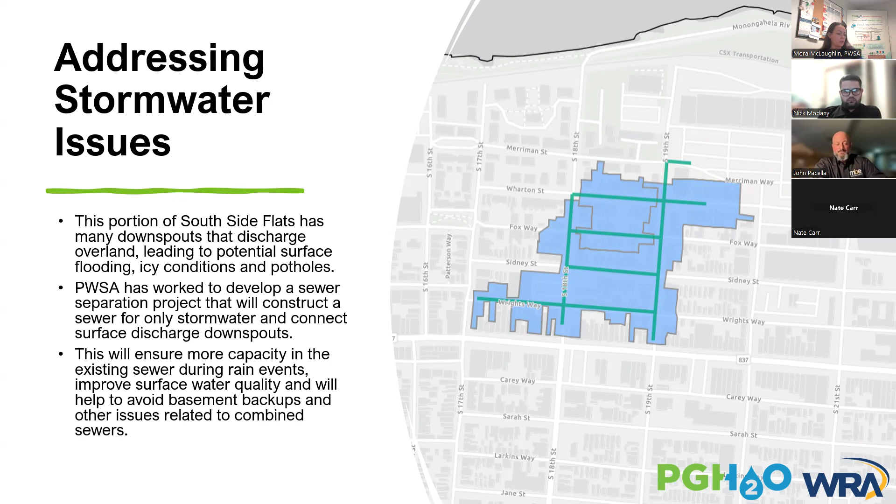So this is a map of the project area. It's laid out, color-coded here. You can see the pink is sewer pipes. There's a couple areas where there's blue pipe, that is the water main. We're going to construct new separate storm sewer pipes, as well as the manholes and the catch inlets associated with those pipes. We're going to connect properties where we can with downspouts to the new storm sewer, plumb them into the sewer. And we're going to replace some water mains on Wharton Street and Fox Way. When we were designing the project, we determined that since we were going to be exposing the roadway and paving after the fact, we want to make sure that as much infrastructure that needs upgraded is upgraded during this project.

So we're going to address those sections of water main on Wharton and Fox Way. As part of any water main replacement project that we do anywhere around the city, we are always looking for lead service lines attached to those pipes. So as part of that work, we're going to identify and replace any lead we find at no cost.

So for anybody that lives on Wharton and Fox, you should have received some lead service line agreement packets in the mail. I think we have almost all of those returned with the exception of a couple. And we're also going to repave and restore sidewalks.

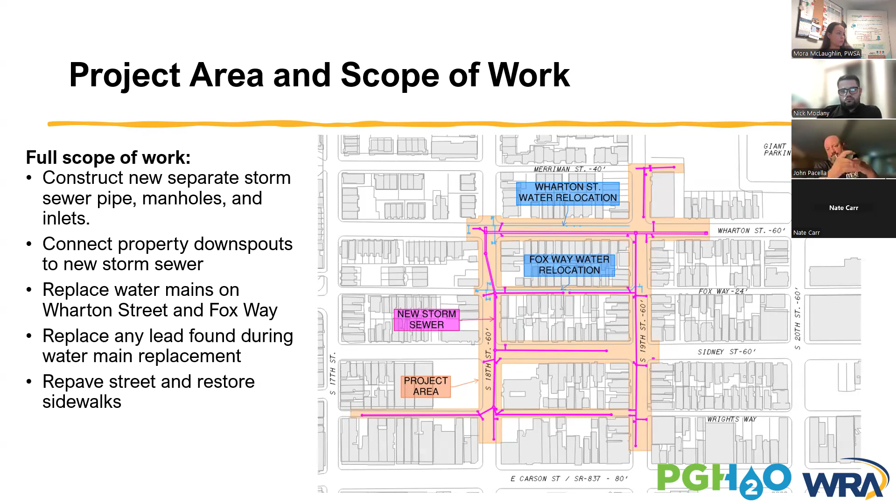So we want to talk a little bit about a touch point that we have with the customers in this project area where we do need something back from the customers to proceed with work. We're calling this the authorization for sewer lateral connection. For the full storm sewer lateral, those who sign the agreement are people that have a downspout at the building face. Repair and maintenance is the property owner's responsibility.

The PWSA owns and maintains the storm sewer and the point where the private sewer lateral, which takes sewage flows away from the home, and the public main connects. Now, a partial storm sewer lateral, this is for people who do not sign the agreement or do not have one of those downspouts that just discharges on the surface. That's from the PWSA storm sewer to the sidewalk.

They're going to repair and maintain the future connection, but that's the property owner's responsibility. And we are going to own and maintain the storm sewer and the point where the lateral and the main connect. So you can see a graphic there of what a sewer lateral is and what a PWSA owned public sewer looks like generally under the street.

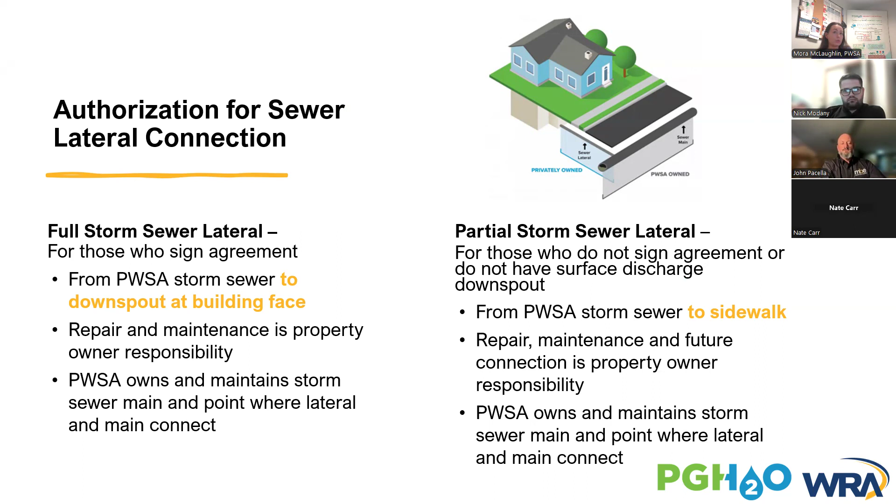Obviously, this layout is a little bit different than South Side Flats. Oftentimes, the properties in this neighborhood are very close to the street and sidewalk. But this is a typical graphic. So in order to do this work, because we are slightly going onto private property, we did send people who are eligible an agreement. It's pretty straightforward. We just need basic property information and a signature of the homeowner.

And like we said, if you decline this work, you choose not to do it, we will not provide that additional service to you. But at this point, I want to see if there's any additional information that our project team wants to share about these agreements, how we can collect them and get them back from residents. Is there anything, Marco, you would want to share quickly?

Hello, everybody. Yes, the CM team does have a list of residents that have signed agreements, as well as a list of residents that don't have signed agreements. We are going to make one effort here to blitz all of the residents at one time, just to let them know as a common courtesy, we'll be in the area. If you do have an agreement, we'll tie you in.

If we don't have an agreement, we're still going to make that phone communication and also document that communication to give one last effort for all the folks out there to at least tie in at this time. So keeping that in mind, we know from talking to Allegheny County Health Department that in the future, if you were to sell your house and there is a separate storm system, they are going to require you to tap in. So we're trying to be a good role model here and a good player to the residents in this location to get everybody to sign the agreements and also get everybody to tie into our separate storm sewer.

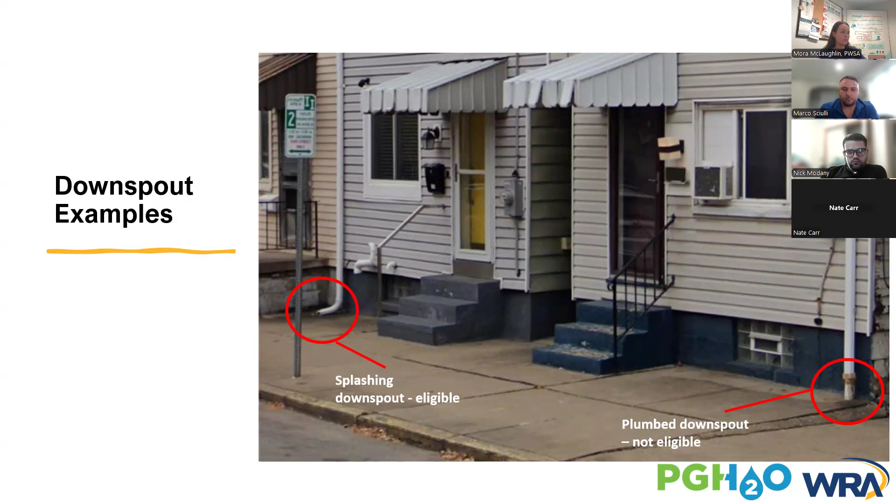All right, and this is just a little bit more information, kind of an underground graphic here. We're going to plan to install a storm sewer and storm sewer laterals from the new sewer main to the public right-of-way and connect any of those downspouts that are discharging on the street and sidewalk, which you saw on the slide before.

The top one, you're kind of looking down at the street and seeing what's underground, and the bottom image is kind of a profile of that new storm lateral coming out of a property down below the sidewalk, down into the street, and eventually connecting to that public sewer main. This is all no cost to our customers. It's part of the design of the project. So I really would encourage anybody who hasn't signed and returned that agreement who is eligible to do it. While the work is happening and the street will be open, it's the best time to do it.

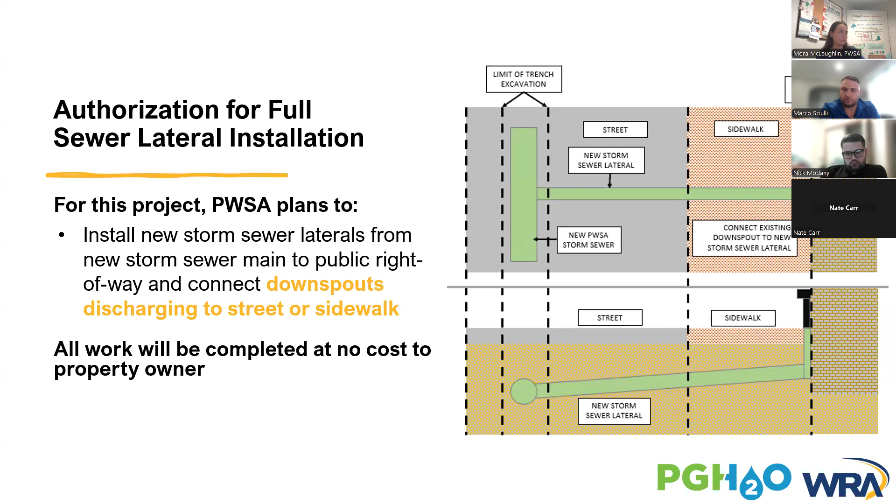And this is the partial sewer lateral installation. So you can see here, slightly different. That new storm sewer lateral is going to be built up to basically the curb line. We are not going to connect that existing downspout that's already plumbed into the combined sewer. But that new storm lateral will be built halfway to the property and will be there and available if in the future the homeowner decides to make that adjustment.

And again, this is at no cost as well. This is a little bit additional work that PWSA might not typically do. But yeah, we wanted to bring that new storm sewer lateral up to the edge of the public property and have it there as an option for the future.

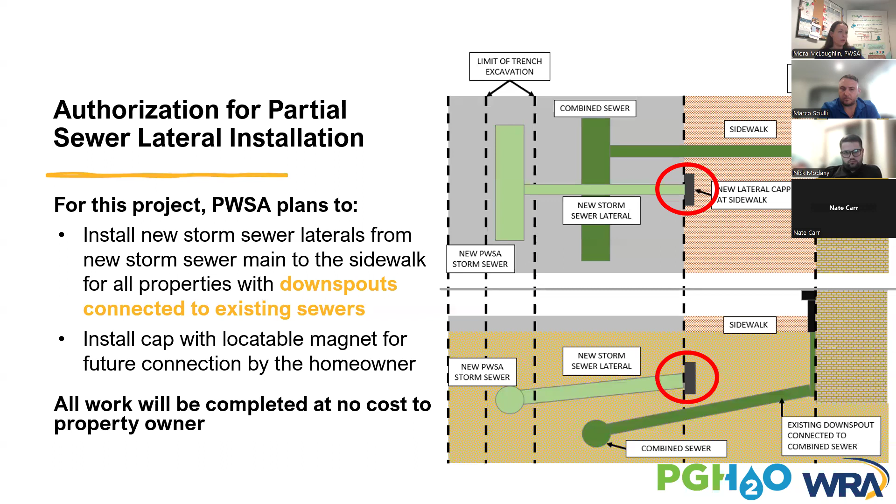Touch a little bit on lead service line replacement. It's going to be related to the water main work. This is only happening, like you saw on that project map, in only certain parts of the area where we determined the water main was due for a replacement. Some of the lead service line replacement work that happened last year was actually part of an American Rescue Plan Act funded project. So we did just get some lead service lines out of the project area, knowing that we were going to be coming through here soon. We wanted to get that work done and out of the way before the more major sewer and water main improvements happen.

But as it relates to the Wharton Street and the Fox Way work, you've been sent a lead service line agreement, which needs to be signed and returned, similar to that downspout agreement, to allow us to have access to your home to replace any lead on the private side of the service line if it is found. The first step will be to dig a small test pit and verify the material of these service lines. Non-lead service lines will remain in place, although the public side will be replaced just as part of the water main work. But if any lead is found on the private side, we then utilize that agreement. We start to work with you and replace that private side lead at no cost.

So again, this is a slightly different graphic than the one you saw a few slides ago. This is a typical water main setup. So you see the public water main running down the street. You see the service line teeing off of that water main, providing service to the home. The portion between the water main and the curb box, some people call it a shutoff valve. It's actually a little valve in the sidewalk that we can turn water on and off at a property. It's kind of the line of demarcation between public and private. And from that shutoff valve into the home is the private service line, which is typically owned and maintained by the homeowner. But as part of this work, if it's lead, we're going to replace it at no cost to you.

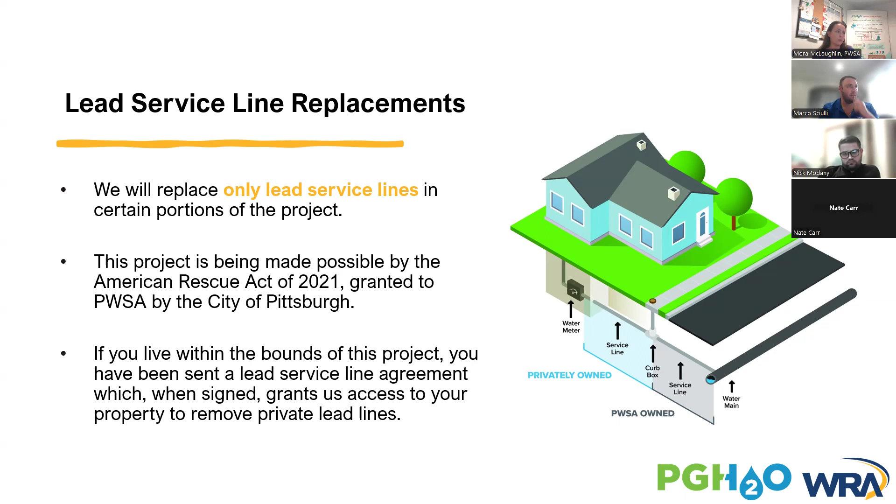So again, there's only a couple agreements still outstanding in the neighborhood, and we're going to chase after those few remaining ones, but just want to make you aware of how this works. We're going to inspect the service line material. As I mentioned, this is a trench where there's a service line connected. We're going to verify the material. It's good to know where the lead lines are so we can replace it. And it's also good to know where the non-lead lines are so we know we never have to come back. We know what the material is, and it helps our overall inventory of pipes.

We're going to install the new service lines after the water main is put in the street. And we'll coordinate, like I said, with any residents that have lead on the day of. We ask that you be present for that. But again, this is no cost. We just ask for those couple touch points where you're around to witness the work happening. And towards the end of the project, along with a lot of other street and sidewalk work around the area, there's going to be restoration.

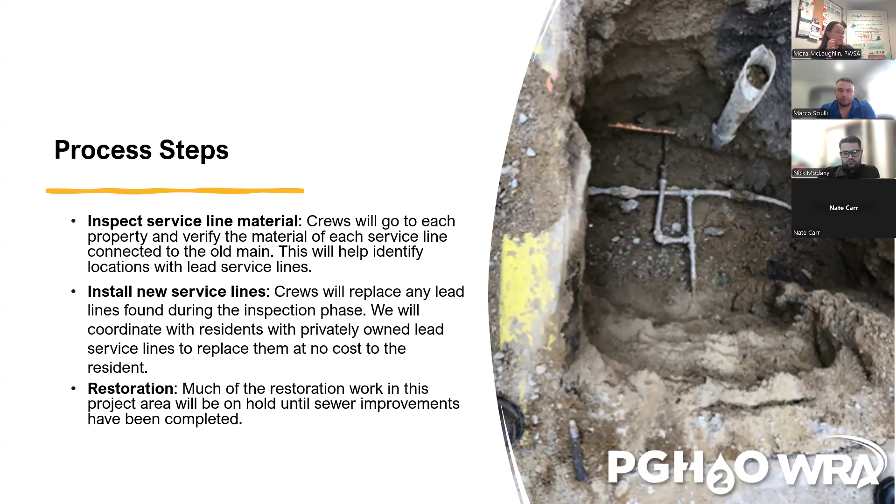And again, the water main replacement, it's tied to this lead service line work as well. It's a typical trench. I'm not sure what neighborhood this is in. This might be somewhere in the East End. Like I said, this is going to happen on Wharton Street and Fox Way. We want to upgrade as much infrastructure as we can at one time.

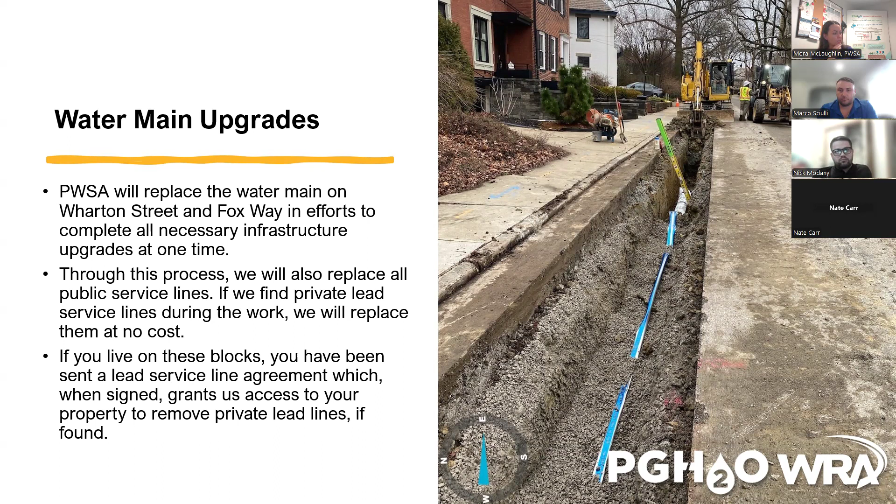Like I said, we're going to replace all the public service lines because they're attached to that old main, and any private lead. But again, if you happen to be on the call and you're one of the people that has not turned that agreement in, or you need another copy, please let us know.

And again, this is just kind of a rundown of the work that will happen. The water main will be installed, service lines will be installed after that. And you might not see restoration work immediately. You might not see the new sidewalk come in right after we're done. Might be a little while, but that's because we do things in an efficient manner.

So we get all of the infrastructure installed, and then a new set of crews may come in to do things like concrete work, asphalt, landscaping if needed. So things are done in phases. So expect there to be a slight delay between the infrastructure work that happens right in front of your property and the final paving and sidewalk work. That's the last step of the project.

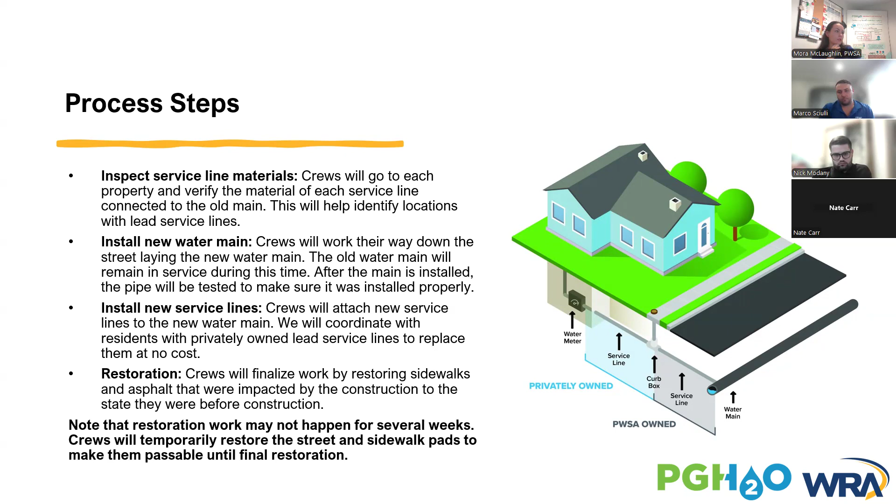So just a little bit about general construction impacts. Like I said, if you've been on or around South 19th, you're seeing some manhole and other sewer work happening. But as with a lot of construction projects, you can expect to see no parking signs added and taken away in the project area as needed.

In the city of Pittsburgh, there is a requirement to put no parking signs out. This comes from the city, not a PWSA rule, but we are to put no parking signs out no later than 48 hours before the work occurs. So we give people 2 full days to be aware that they need to move their cars. So just keep an eye out for those.

This is a longer project, and we'll talk about the construction schedule here shortly, with several different components. So we're going to work as well as we can to keep the impacts and the detours and no parking signs as minimal as possible. We understand that this is a very tight neighborhood, and parking is limited, so we will do our best to keep that kind of disruption limited to where we are working.

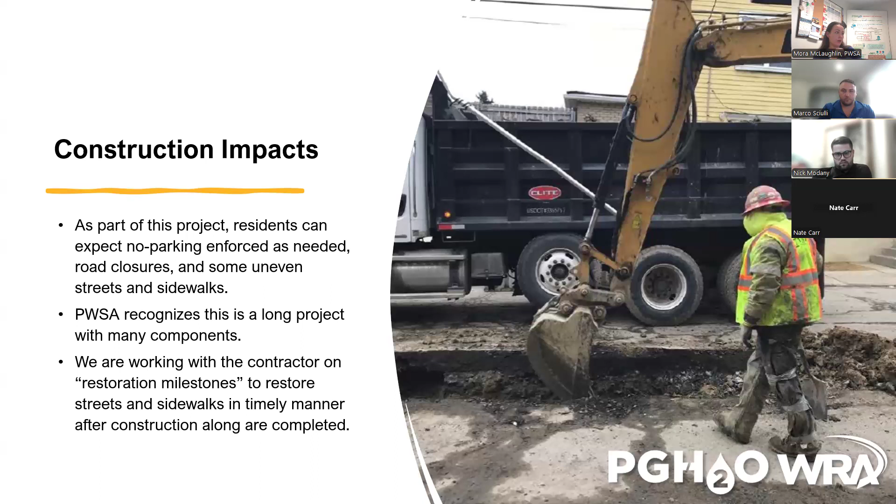We are also working with a contractor on restoration milestones. So we're not going to let these sites drag for a very long time. We're going to have a kind of systemic way of making sure things are restored in a timely manner at certain checkpoints in the project.

And this is probably, for some of the residents on the call, the slide you've been waiting for. This is a breakdown of our anticipated schedule, weather dependent and subject to change as all construction is. But as you know, we did start work in June and July of 2024. We started repairs to the existing sewer that's in the ground, that combined sewer. And we're beginning the installation of the new storm system, including laterals and those catch inlets for surface water.

By about October, you should start seeing the new construction of the storm sewer system along Wharton from 18th to 19th. So that'll be ongoing. By about February of next year, we're going to start construction on the water main replacements on Wharton and Fox, as well as any lead lines we find. A lot of this work, I assume, Marco, will kind of be happening in tandem at this point throughout the project.

But by August, we should be complete with the storm sewer and water main construction, so the pipe will be in the ground. And beyond that, we're going to start working at final restoration sites, cleaning the project up, making sure all the little, what we call punch list items, are addressed. And we anticipate complete restoration by October 2025.

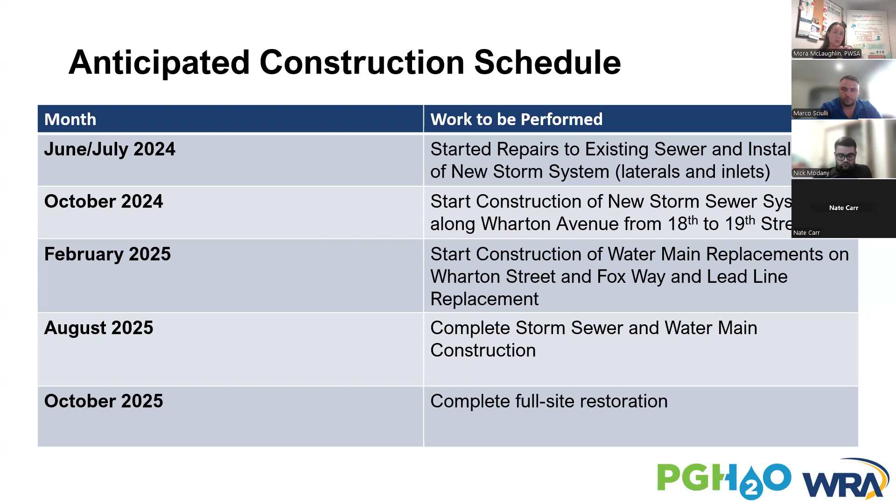For these downspout disconnections and the downspout questions, as it relates to individual properties, Nate on the call, our assistant project manager, can address those. And I'm going to keep our project page updated with construction milestones and other information that can be found at pgh2o.com/SS flats sewer.

So with that said, that comes to the end of our presentation. I wanted to leave time now just to kind of have a roundtable discussion, answer any questions.

Mike, I see your hand raised. Oh, did you say Mike? Yes. Hi. Oh, okay. Sorry.